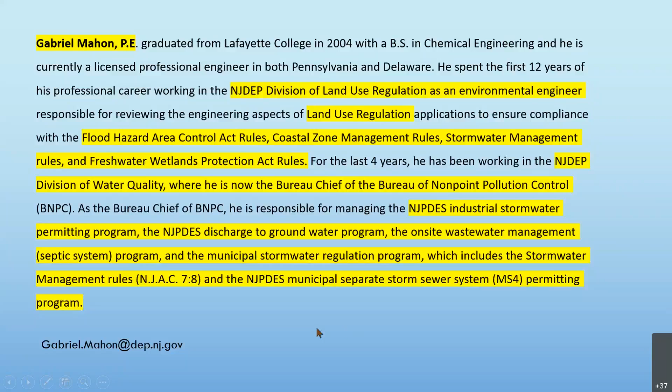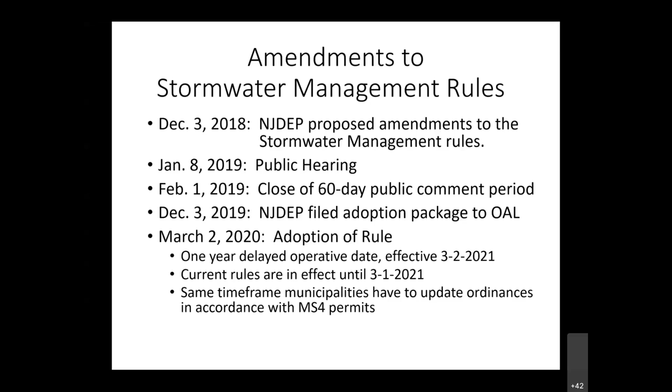At the same time, part of the implementation of the overall rules is that a municipality has to have a stormwater control ordinance. So when we amend the rules, it doesn't automatically amend their ordinances - the municipalities have to actually go back and amend their own ordinances. Our MS4 permit already sets up a time frame for municipalities to do this under any circumstance, even if we just noticed your ordinance isn't good and you need to fix it - they have a year to fix it after we notify them. That year was already set forth, and we wanted to line up when we're going to start reviewing it at the state level versus when it's going to happen at the municipal level. Of course, we can't guarantee the municipality will adopt their ordinance exactly on March 2nd of 2021, but having that 1-year delayed operative date will at least minimize the amount of applications reviewed at significantly different standards at the different levels if you need both permits.

Next thing I want to cover is what projects have to comply. I think you're probably all familiar with the term major development. What we're looking at here on the screen is the amended definition of major development under these rules. There's not sweeping changes to the definition, but there are some important things we were doing through frequently asked questions and some changes as a result of these amendments that we incorporated into the definition.

First I want to cover the intro statement. Now it says that it means an individual development as well as multiple developments that individually or collectively result in the following. In my opinion, that's mainly clarification of our own practices in the past, although it was never very clear before. The rule did say that you needed to count the ultimate disturbance and ultimate impervious surface on a site, but it wasn't clear exactly what that meant. Our frequently asked questions did try to clarify it and make sure that you couldn't break projects up into smaller projects to avoid regulation that way. So we're just trying to clarify it here to make it very clear that whether it's one development or multiple developments, if it totals up to one of these, it's major development.

The other main thing we've done is add timeframes to a lot of the various items here. The first one is the disturbance of 1 or more acres of land, which is unchanged, but we've tied it to February 2nd, 2004. When you're thinking about ultimate disturbance, that question came up many times: are we counting disturbances from 1990, or something from 1945? No, we're only counting things post-2004. That basically ties back to when the rules in their current form were adopted, which was February 2nd, 2004.

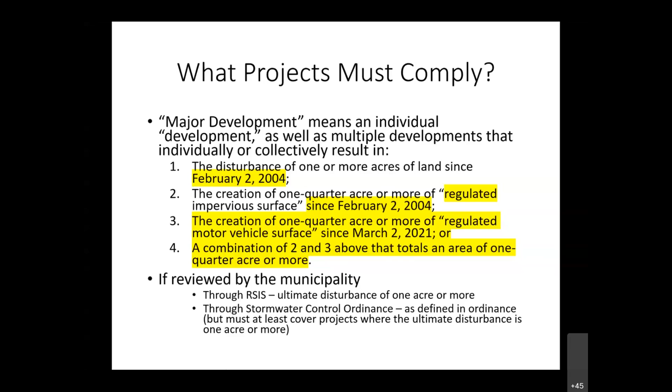Okay, next thing I want to cover is the layout of the rules and how we changed it. I'm only really going to talk about subchapter 5, our design and performance standards. That's really the meat of what someone's generally looking at in our rules. And this is what the existing subchapter 5 looks like.

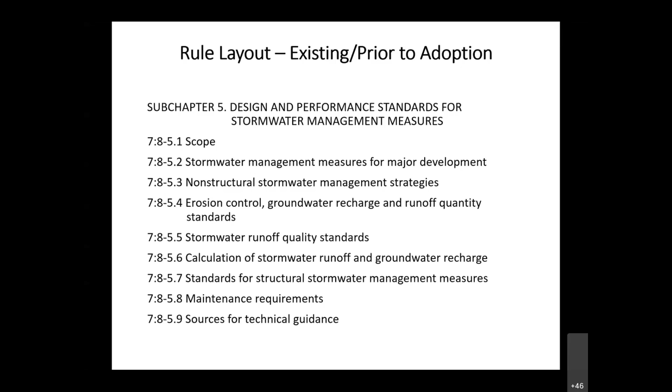We've got the scope, we've got the stormwater management measures for major development, which is a bunch of generic items that really apply to all major developments. Then we've got non-structural strategies. 5.4 is erosion control, groundwater recharge, and runoff quantity all together in the same section. 5.5 is quality. 5.6 is how you do your calculations. 5.7 is the standards for structural measures. 5.8 is maintenance, and 5.9 is sources for technical guidance.

And these are the edits that we're making. First of all, one of the major changes we're making to the rules in general is replacing the non-structural strategies with the requirement to use green infrastructure. Now, the non-structural stormwater management strategies aren't being completely deleted from the rules. They're being moved from subchapter 5, the items you'd review directly against a development project, into the municipal planning requirements, where it's more considered in the municipal plan as they put things together.

Because a lot of the non-structural strategies are about preserving areas, not so much items for actually managing stormwater, but they fit well into a municipal planning effort where they could decide, well, we don't want development in this section, we want to encourage it over here, so we're going to preserve some of this area over here. That's where a lot of the non-structural strategies, maybe not all of them, but a lot of them belong. And that's where we moved them.

The other thing we've done is we've taken a look at 5.2 and 5.7, which both were really generic items that applied to all major developments. We decided there was no real reason to keep 5.7, structural stormwater management measures, distinctly separate from 5.2, so we combined them together. 5.2 is now significantly longer because of that, but it really is just all generic items that apply to everything. 5.7 had things like what's the spacing on your trash rack, what's the minimum orifice size for a basin. No real reason it needed its own section in the rules.

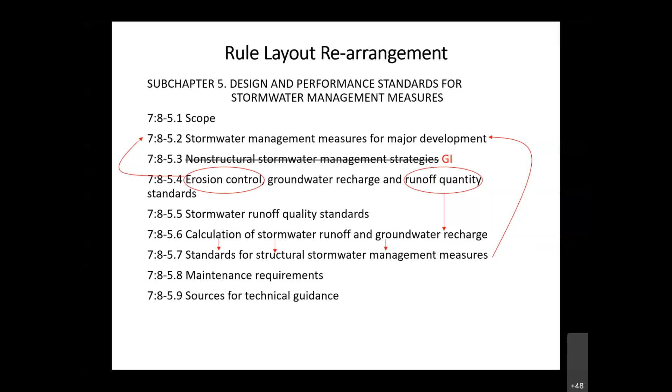And so this is what the layout turns into. We have the scope, and we have the much expanded stormwater management measures for major development. We have green infrastructure, groundwater recharge, stormwater runoff quality, stormwater runoff quantity. You've got your calculations, your maintenance, and your sources for technical guidance.

So what I think this has done is simplified the rule structure, and it's made the most important points of the rule structure, 5.3, 5.4, 5.5, 5.6, each given their own section, which I hope makes it more clear to everyone. I think clarity leads to better designs and better applications overall, so I think it should be helpful in that regard.

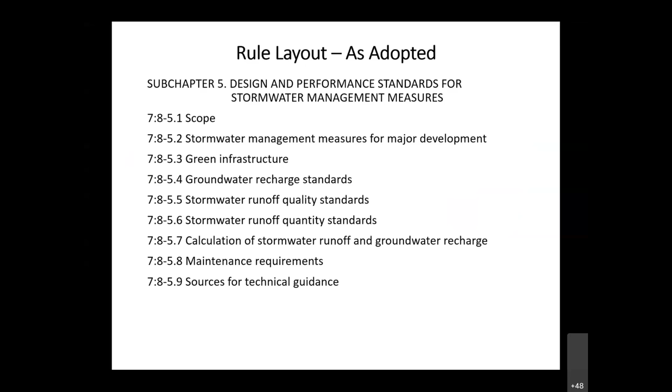A question I've often gotten, and now when I give this presentation I try to answer it up front, is why doesn't this say anything about evapotranspiration? You're right, it doesn't. But there's really one reason for that, and that is that in the design of a stormwater management basin, we don't really take evapotranspiration into account. When you're designing something for the 100-year storm, the amount of evapotranspiration you get in the maybe 72 hours at most that water is in a stormwater management basin is really largely irrelevant to the sizing of the basin. So it's not something we account for in the calculations.

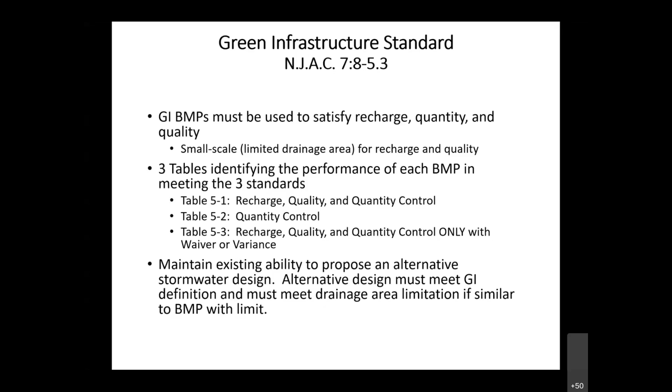So it's much simpler to choose a BMP we've already designed and approved, because then the designer doesn't have to answer any of those questions. But that option exists. I'm going to go through the tables now.

So this is Table 5.1. These are BMPs that you can use for recharge, quality, and quantity. These are the small scale green infrastructure BMPs. You've got cisterns, dry wells, grass swales, green roofs, and MTDs.

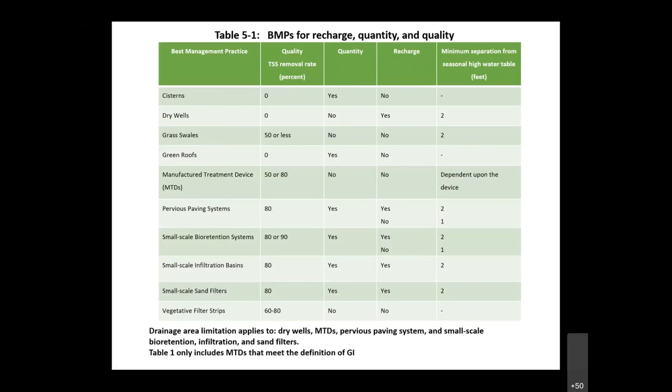Now, that might seem surprising a bit, but there are several MTDs that we've now certified as green infrastructure. If you want to look at the list, you can go on our website at njstormwater.org, and go to the BMP or the MTD page there. We've now broken the table out into two separate tables, one that shows which are green infrastructure and one that shows which are not.

Basically, the BMPs we've approved so far that are green infrastructure are pretty much all some form of a small scale bioretention system that comes like in a concrete vault. We are starting to see some innovation here, which is good to see, and something we hoped we would see when we made these changes. People are now looking at trying to do some MTDs that can provide some sort of infiltration, getting a little more creative. There's a constructed wetland type MTD that someone is just coming through with. It hasn't made it to my desk yet, but it's with NJCAT at this point, who verifies the functionality before we do the certification of them.

So there are going to be some more creative MTDs coming down the lines, and some of them may be green infrastructure. Also, we've got pervious paving systems, bioretention systems, infiltration basins, and sand filters, all of which need to be small scale. Remember, these are the small scale BMPs, so they have to be small scale, and then vegetative filter strips.

Now, I mentioned previously that the way we're getting small scale is by using a drainage area limitation. And a drainage area limitation does apply to dry wells, to MTDs, to pervious paving systems, and to small scale bioretention, infiltration, and sand filters. It's not the same for every one of them.

Dry wells have a 1 acre drainage area limit to remain small scale. MTDs, as well as small scale bioretention, infiltration, and sand filters, all have a 2.5 acre drainage area limit. And then pervious paving systems has a different type of drainage area limit. It's a 3-to-1 ratio. So if you have 1,000 square feet of pervious paving, you can have 3,000 square feet of regular impervious paving drain onto that, and that meets the small scale, that meets the drainage area limit.

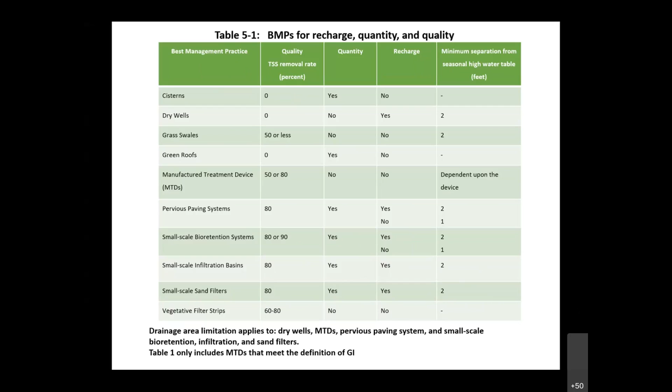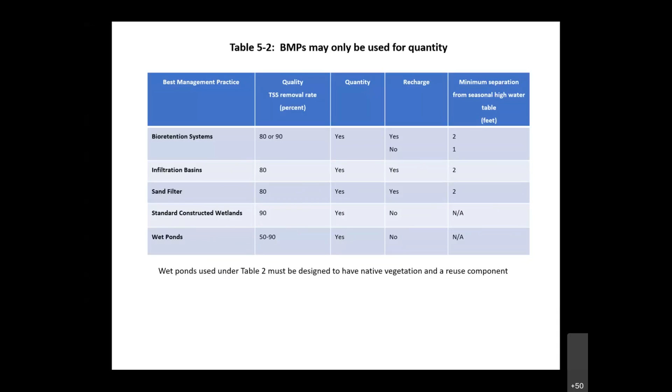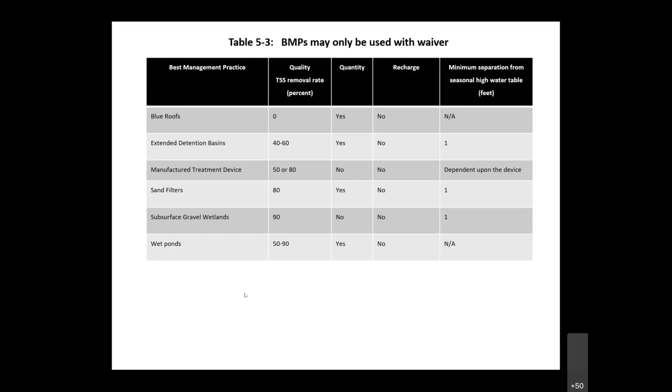Now, one other thing to think about with some of these is you could get creative. I've certainly seen some designs on the internet, not necessarily applications we reviewed, of combination green roofs and blue roofs and things like that. And you can probably get yourself qualified as green infrastructure if you do something like that that's creatively using these together, because it'll still have what's necessary to meet the definition of green infrastructure. So if you have a green roof and a blue roof, you've done the treatment with vegetation. So the fact that you're then retaining it also is not necessarily a problem. It's not going to preclude you from being green infrastructure. So you can combine them together and still use some of the aspects of these.

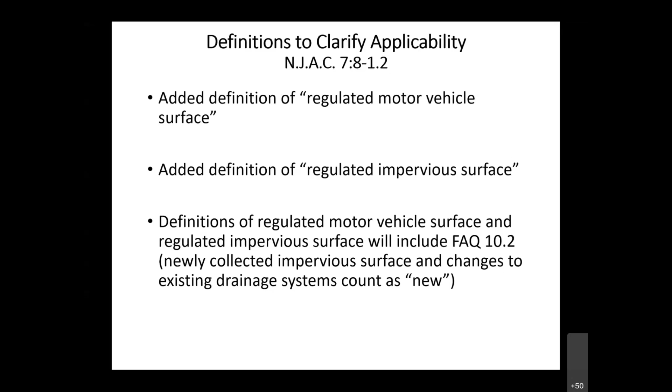Continuing the clarifications to applicability here, we've also made it clear that quantity, quality, and groundwater recharge have to be met in each drainage area on site unless they converge before leaving the property. This was very clear in our previous rules for the water quality standard, but for some reason it was not incorporated into the water quantity or groundwater recharge standards. Drainage areas aren't necessarily the same as your recharge areas. We thought about coming up with a separate term for that, but it seemed to make things far more complicated than needed, so we stuck with drainage area. Particularly from a quantity perspective, the fact that this wasn't previously incorporated, I don't understand why, because it allowed you to do your quantity control on one side of the site and not the other, potentially adversely impacting the property owner on the other side and still meet the rules.

Of course, in practice, we would never let someone do that. We would tell them they couldn't, but now we've actually modified the rules to make it very clear that you can't do that. Another thing we've done is move the requirement to do a groundwater mounding analysis from the groundwater recharge standard into section 5.2, the standard for stormwater management measures, so it applies to everything. It's not just if you're doing groundwater recharge that you need to do a mounding analysis, it's anytime you're doing infiltration.

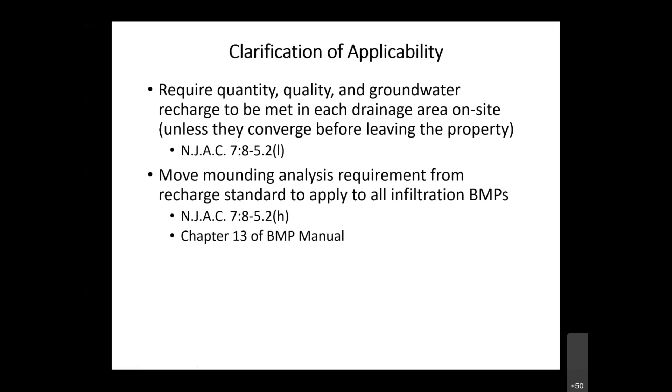Another thing we've done is a deed notice for green infrastructure. Under the non-structural stormwater management strategies currently in place, there was a requirement that if you're preserving something, you need a deed restriction, a conservation restriction for it. That makes a lot of sense—if you're preserving a forest as your non-structural strategy, you can't just cut it down after getting approval, so you'd have to deed restrict it.

We thought about doing the same thing for green infrastructure, but decided that was too onerous. We're looking at trying to require people to do multiple green infrastructure BMPs throughout a site, so having a deed restriction or conservation restriction on each and every one just wouldn't work out well. Anytime someone wanted to modify or move one, say they have pervious paving in their driveway or rain gardens along the house, and they want to put in an addition or move their driveway, they would need to come to the department, to the commissioner, to get their conservation restriction lifted. That really isn't the intent of what we want to do.

So we've decided to just do a deed notice, and this deed notice will require that they incorporate the description of the BMP and its locational information, in state plane coordinates, on their deed. This will be in addition to the requirement already in our rules that they have the maintenance plan attached to the deed. So now on any property where there's one of these green infrastructure BMPs, they'll have a description, locational information, and the maintenance plan—everything they need to know to manage that BMP going forward.

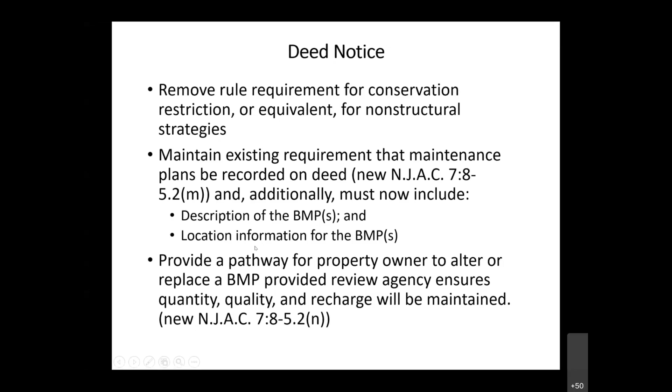There are also a few changes we incorporated related to combined sewer overflow. As you're probably aware, we've got 21 municipalities in New Jersey with combined sewer systems. A combined sewer system carries both stormwater and sanitary wastewater in the same line, which is no problem when it's not raining, but whenever it rains, those systems overflow because there's not enough capacity to bring all that water to the treatment plant.

So as we're requiring municipalities to figure out ways to eliminate their combined sewer systems through our other rules, through our NJPDES rules, we're doing some of this to help give them every tool in the toolbox they possibly can to make that happen. One of the things we're doing is clarifying that water quality treatment is required for discharges in combined sewer systems.

There is an exemption in the current rules, still retained in the amended rules, from the water quality standard for projects where you have an NJPDES permit with a numeric TSS effluent limitation. And that makes a lot of sense, right? If you already have an NJPDES permit for, say, your wastewater treatment plant, and you put your stormwater into the plant's process, well, you don't need to do your 80% TSS removal under the stormwater management rules because you're going through the treatment plant's process, and it's going to remove more than 80% to begin with already. An NJPDES permit with a numeric TSS effluent limitation is going to come with a requirement that you sample your stormwater before you discharge, so we're going to have proof that you actually met the water quality standards that way. So that exemption makes a lot of sense.

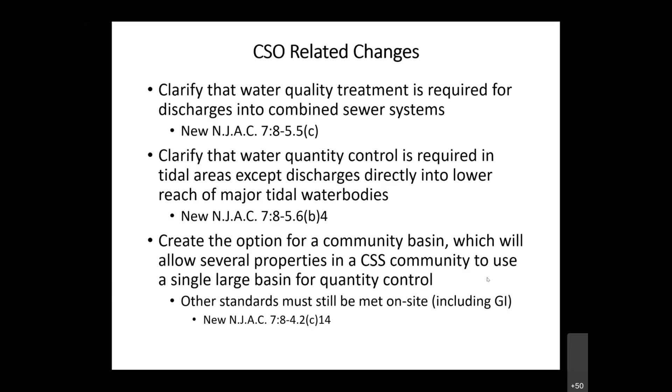At the same time, they would still have to do quality and recharge on their site, so it's not like they're getting out of incorporating green infrastructure on the property, it's just for quantity. Again, I don't know if anyone will ever use that, to be honest. Just an idea we came up with, because we wanted to give our combined sewer communities every tool they could come up with. So this is just something we threw out there.

Okay, last thing I want to go over is the variance. This is the existing variance standard at 7:8-4.6. This allows a municipality to grant a variance for stormwater management if they have a mitigation plan as part of their municipal stormwater management plan. That mitigation plan has to identify what measures are necessary to offset the deficit created by granting the variance, and ensure that mitigation happens in the same drainage area for the same design performance standards.

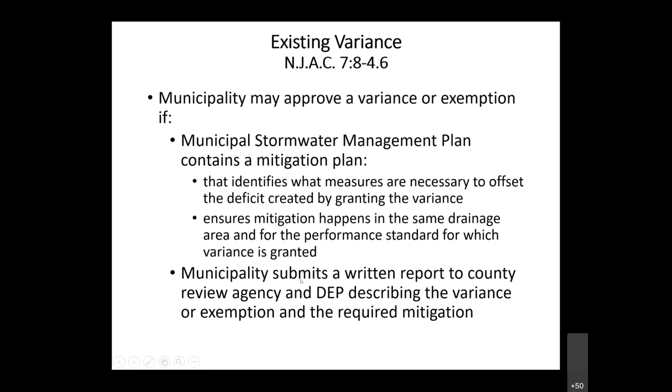A municipality has to submit a written report to the county and to the DEP describing it, but that's it. There's really no clarity on exactly how you do this. So we've added a lot more clarity and a couple of restrictions.

On the previous slide, there was no restriction on when they granted a variance. It didn't say the designer or developer has to even prove they couldn't do it on site, it just said if the municipality grants it. Now this makes clear they have to do it on site unless it's technically impractical for engineering, environmental, or safety reasons. Even then, they still need to meet it on site to the maximum extent they can, and the mitigation off-site covers just what could not be met on site.

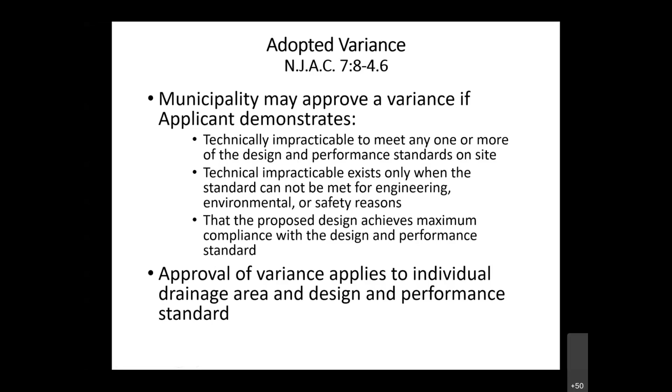It's also made clear that the approval of a variance applies only to the individual drainage area and design and performance standards. So if you say you can't meet quality for some reason and the municipality agrees, that doesn't mean you also don't do quantity on site. That just means you do your quality off-site as mitigation.

We've also added clarity on when and how you construct a mitigation project. One question we've gotten is whether the mitigation project has to be within the actual mitigation plan. We've made clear that no, the project doesn't have to be spelled out in the mitigation plan, but the mitigation plan has to be used to evaluate the project. So it could be spelled out in the plan, or the developer could propose it, and the mitigation plan just gives the municipality the tools to evaluate whether that's appropriate.

We're also now requiring that it be approved no later than preliminary or final site plan approval of the major development. That makes sense, you can't just defer your mitigation into the future. It also has to be located in the same HUC 14. Previously it just said drainage area, which was pretty unclear, since we're all in the drainage area of the ocean. So this clarifies that it has to be in the same HUC 14.

It also has to be constructed prior to or concurrent with the major development, not just approved. If you think about it, if you're saying you need to do this on site to avoid an adverse impact, and you're doing it off site because you can't do it on site, you need to construct the off-site stuff first. Otherwise your on-site project could potentially have adverse impacts on surrounding properties.

It has to comply with green infrastructure standards. The applicant or party responsible for maintenance of the major development has to be responsible for the mitigation project too, so you can't set up a third party LLC to do the mitigation for you. It has to be the same entity. So if it's a residential development, you could have a homeowners association, and yes, that association could also be responsible for the mitigation project, but you can't create some other third party to be responsible for that.

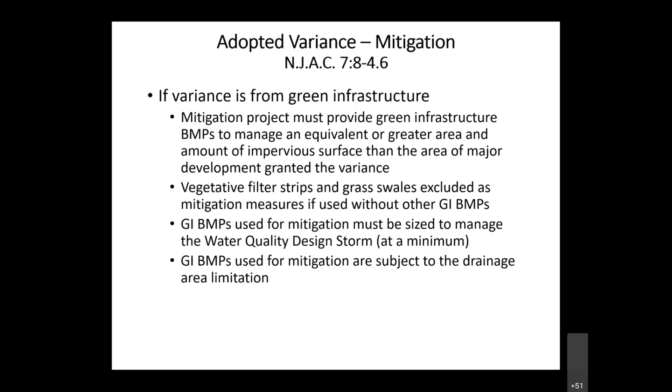One important thing to note on Chapter 5 is that it will allow infiltration in your quantity control routings in green infrastructure BMPs. Also, Chapter 12, while we haven't made a ton of changes to soil testing requirements, incorporates some new concepts and requirements if you're doing small-scale distributed green infrastructure systems. If you're putting small-scale green infrastructure all over a site, having two soil profile pits in each one, especially when they're only 1,000 square feet, is excessive when one pit might excavate the entire BMP area anyway. So we have less onerous requirements for those distributed systems.

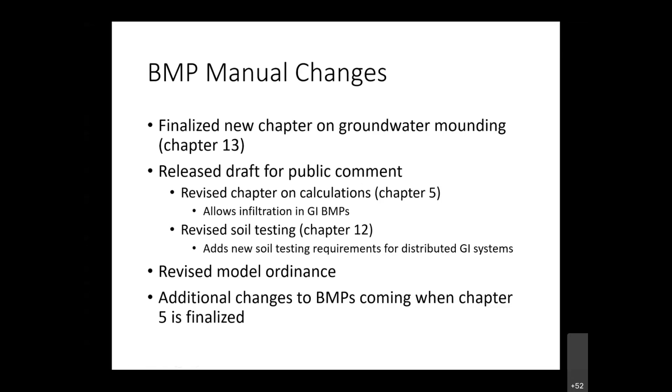We also adopted a revised model ordinance that municipalities can use instead of creating their own. Be aware additional changes will come when we finally adopt Chapter 5, because some of the calculation concepts in there will need to carry over into other chapters. Now, I do have some examples I can go over if there's still time.

These are questions I often get about how the new standards, particularly regulated impervious surface and regulated motor vehicle surface, apply to roadway projects. Let's say you're reconstructing an existing roadway and nothing else—it's over an acre, but you're not adding any new impervious surface, curbing, or collection system. That's technically a major development because it's over an acre of disturbance.

But because you're not changing anything, you won't have to do anything for quantity control, since one way of meeting quantity is to not change the hydrograph, and this wouldn't change it. You won't trigger water quality since you're not creating new impervious or motor vehicle surface. And for recharge, it won't affect the amount of recharge happening on site, so you don't have to do anything there either. So while that could be a major development, you don't really have to do anything.

It's when you start adding other things into the project that you have to address stormwater management more thoroughly. So let's say you're adding a curb and a drainage system—I briefly touched on this. It depends on the exact scenario, but if there was existing water quality treatment happening, which occurs in many cases, adding a curb and collection system where there wasn't one before is going to trigger the water quality standard at that point.

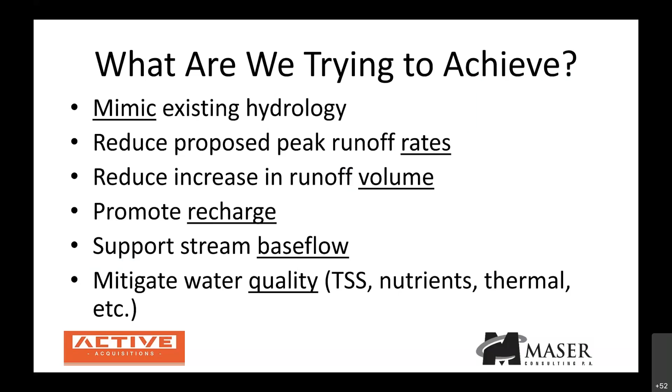And that helps make the rules much more obvious. If you kind of have this in the back of your head that we're looking to mimic hydrology, reduce runoff rates, reduce volume, promote recharge, promote base flow, mitigate water quality. If you kind of keep that in your head, then everything kind of makes common sense.

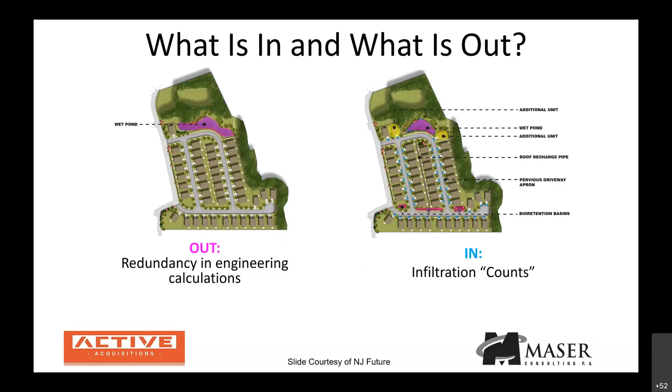We're addressing the stormwater throughout the site as opposed to the end of the pipe. By doing that, there's actually the potential to get more development yield. If you compare the two, you'll see in the yellow there's 2 additional units shown, which was important to the regulated community because that was a way to help offset the costs of constructing all this green infrastructure throughout the development. So it's really a win-win. Developers are getting a better development, and at the same time, we're achieving a far superior result in terms of stormwater management. That's basically this bottom thing here, just saying that benefit.

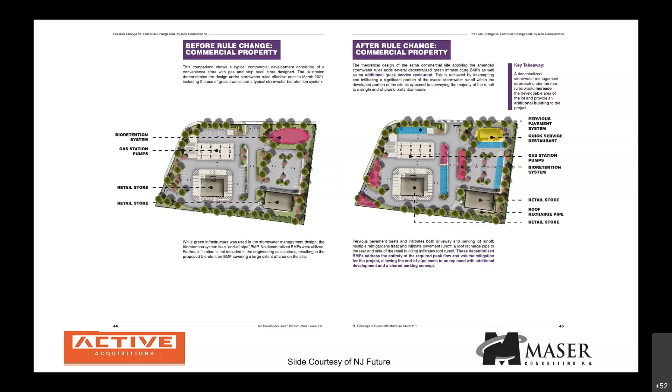So this is just kind of blowing up on it. You can see the bioretention system in the top right. This slider is actually live in the manual on the internet, so that's a cool way to go back and forth. But here you'll see we've added the porous pavement, we've added the bioretention.

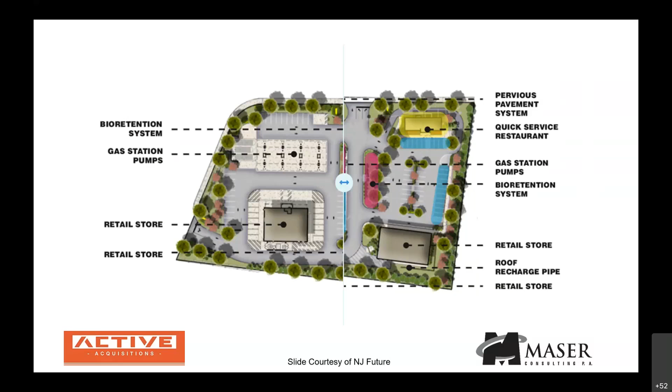It's important to remember too that green infrastructure is not just doing basic suspended solids removal. It's also capable of doing thermal buffering so we don't get overly heated water coming off these hot surfaces directly into streams. It's also very effective at nutrient loading, whether phosphorus or nitrogen. So there are many other benefits, even though they're not formally regulated with a numeric standard, green infrastructure is still achieving that. It's gone way beyond the old-fashioned detention basin with the 3-inch orifice just trying to get suspended solid reduction.

And again, you can see the whole site with some additional bioretention. So stormwater management will count now fully, and probably the biggest thing is the infiltration. It allows infiltration at the design rate, which is basically with a factor of safety of 2.

You do have to, and this is very important, and I'll talk about this more later, check the groundwater mounding. So it's not just whether the soils can handle it, but whether based on the drainage area, the shape of the BMP, the groundwater mound is going to retard, from a routing standpoint, the flow of water into the ground. So there is a little bit more complexity from a design and calculation standpoint, but it's certainly well worth doing. You're going to get a better design overall by looking at this fully from a realistic aspect.

But it's not just infiltration. For non-infiltration, there are ways to count that too. So you should always be counting your GI, and that's something I really preach to design engineers, to make sure they're taking full credit, because we want this to be well received by the regulated community. The key part is that they're not just experiencing extra costs of green infrastructure, but receiving benefit on the back end, as I showed in some of those side-by-side examples. So this is a way in a non-infiltration BMP - the reduced curve number method is a great example of how that can be done, which I have some additional slides on.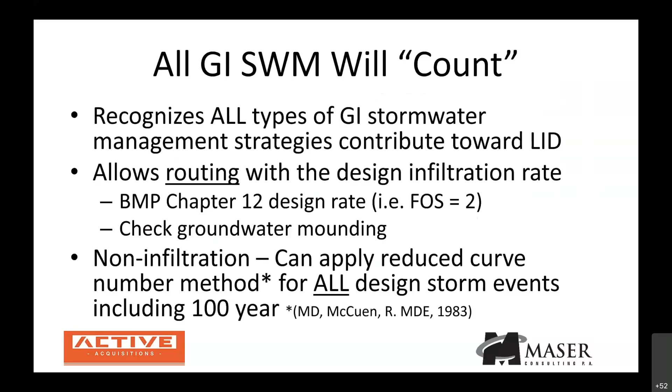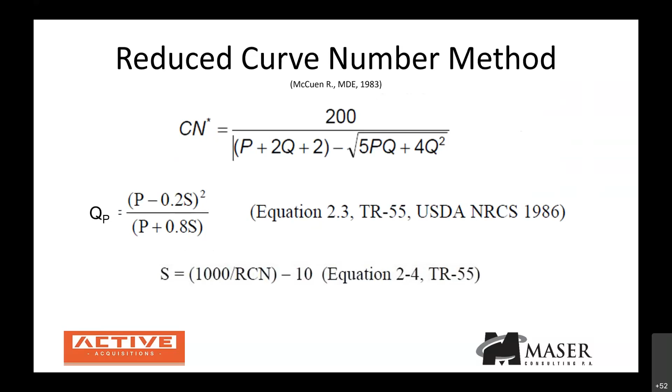Reduced curve number method is essentially transforming the curve number based on the volume of the BMP. Traditional curve number for impervious surface, for instance, would be 98. But if you've got some small scale BMPs servicing that impervious surface, maybe that goes down to 88 or so, depending on the exact volume. So it's a way to transform that curve number for that particular drainage area. Then when you route your end of pipe system, you're using that area with the small scale BMP as a CN of 88, which inherently reduces the size required for that end of pipe system.

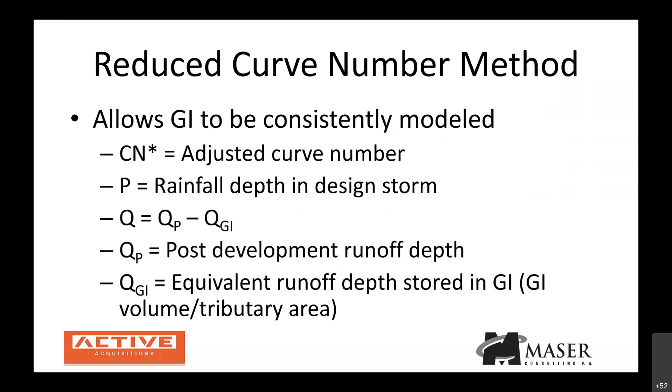This will be in the recording, so you'll be able to go back and look at this later, but this just kind of defines what all those different variables were in the equation.

So Gabe touched on this already. There's this new chapter on groundwater mounding. It relies on the Hantush method. It's fairly straightforward, so those of you that are engineers will be somewhat familiar with it. There's a lot of good examples and clarity in the BMP manual, so it's definitely a chapter worth reading cover to cover. You heard from Gabe that these new chapters are about to come out, Chapter 5 and Chapter 12.

The Chapter 5 revision is actually the one that's going to allow infiltration. There'll be additional changes to Chapter 9, which covers the individual BMPs, that will mirror that, basically allowing the infiltration. We'll talk about some of the details.

Very important is the revised soil testing. This is really a step up from the former Appendix E. The methods and procedures are laid out much better, in a lot more detail, to help deal with the typical mistakes that are made.

One key thing in soil testing is, in order to do the groundwater mounding, in addition to the soil characteristics, you have to know the depth or thickness of the saturated zone. So a continuous boring is necessary to do that. Otherwise, you can assume a 10-foot thickness, which might be fine on a typical convenience store site, something relatively small, probably not worth going beyond that. But for a site that's anything bigger, it's going to be worthwhile to get that. So that's something you should be seeing in submissions, with the geotech reports, is some additional data with regard to the groundwater mounding.

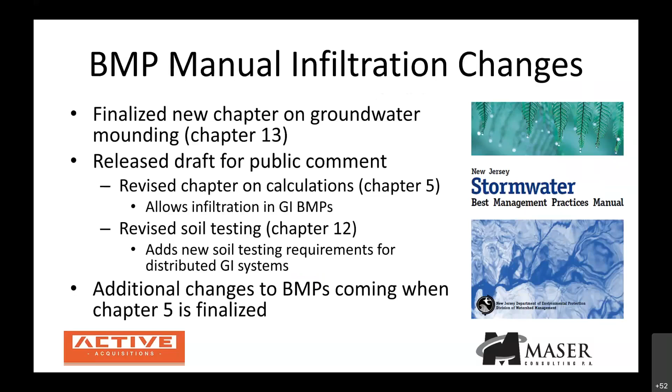So in terms of the approach, I'm always trying to lay out for design engineers kind of what are you going to do different now? And then for you folks, primarily as regulators, what are you going to see different?

What you should see in terms of submissions is a lot of small scale green infrastructure. There's a regulatory reason for that, but also the smaller and more distributed the green infrastructure is, the more credit you can get for it. Because groundwater mounding becomes much less of a factor when you have small scale green infrastructure distributed all over the site. The more concentrated they are, the more of an issue groundwater mounding is. So if you want to fully capture this benefit from counting infiltration, you really want that distributed. There's some other inherent benefits to that as well.

The more distributed they are, the less likely there is to be a wholesale failure, because if any one BMP were to fail for whatever reason, it's only one of many, as opposed to having one end of pipe infiltration basin. If that fails, well, now the whole site doesn't operate. So there's definitely a lot more security because now it would require multiple failures in order for a site to holistically fail.

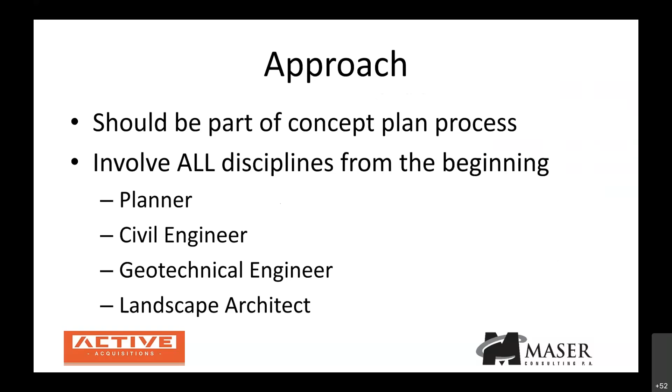We always kind of map soils as part of concept planning, but now we want to go beyond that and really use every leftover area. So you really need to have a full understanding of what the soils look like site-wide.

Gabe had mentioned in his presentation that there's some ability to reduce soils testing when you have consistent conditions. But if you have a variable site, it pays to do that work up front to understand what you're dealing with, so you can customize BMPs in each part of the site for maximum effectiveness. That helps you be most effective from a stormwater management standpoint, but also get the most bang for the buck in creating these BMPs.

Another thing to consider is whether you can get multiple functions out of the BMPs beyond just stormwater management. For instance, one thing we've successfully done is create BMPs that are around or in the view shed of an outdoor seating area from a restaurant, or intertwined into a public area, maybe a playground, where now it's not just functioning as stormwater management, but creating a view shed or park-like setting to use as well.

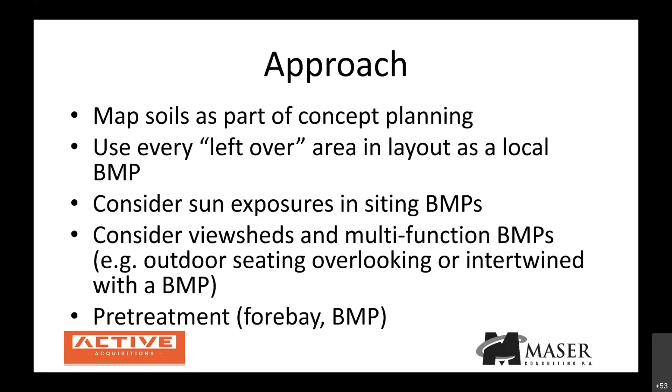Pre-treatment is also very important. A forebay or another small-scale BMP in front of the table 5.2 large-scale BMPs is going to be very important from an infiltration perspective. So if you're having those pre-application meetings, remind folks that that's a key element.

This maybe isn't as applicable to the districts, but it's something I like to point out. Bioretention is definitely going to be one of the most popular choices when implementing GI for a number of reasons. One, they look great. Two, it's very effective from basically every regulated aspect. But it certainly goes beyond that.

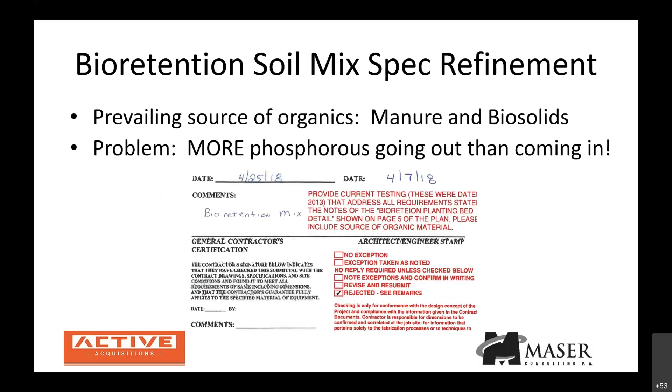Bioretention is very effective at nutrient removal. I have found, though, in doing some DEP grant work, that depending on the mix, it can actually increase the problem - you could actually have more phosphorus going out than coming in. That all has to do with manure and biosolids, so keeping that out of the bioretention is key. You want it based on organic matter, plant-based materials, no manure or biosolids.

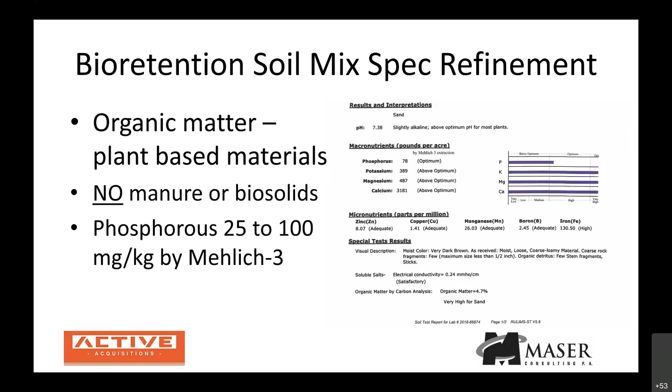You want the phosphorus down to 25 to 100 milligrams per kilogram by the Mehlich 3 method. These are relatively easy to achieve in commercial production.

The other important part is the aggregate - not just the organics, but the actual sands and so forth. We have found that keeping the fine and very fine sand to a maximum of 25% is very important. We're still working out what a minimum coarse percentage might be, but the more uniformly graded the aggregate is, the more successful it is, because it just can't bind up.

We found they take a lot more abuse. That's true in straight infiltration too, even when it's not bioretention, where you just have an engineered sand layer. A uniform coarse sand as the top 6-inch layer is really a lot more resilient than your typical K5 sand, because K5 can actually qualify as quite a few different mixes, and not all of them are as resilient as a uniformly graded coarse sand in terms of maintenance.

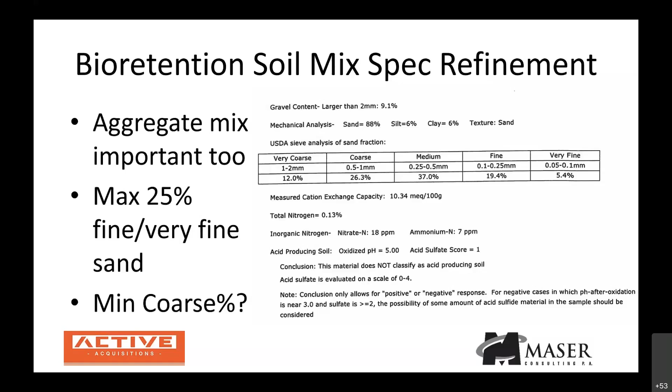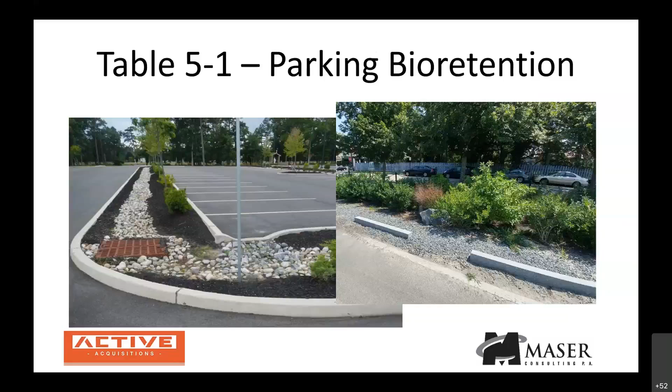The one on the right was actually in Newport - this is a commercial shopping center. I like the way they did it here. They had a flush curb that kept the asphalt pavement nice and neat and straight, and then they had these relatively attractive wheel stops just to keep somebody from running right through it. But because it's open like that, with this gravel edge, it keeps the stability and slows that water down as it's coming off of this asphalt. And then it goes into that landscaped area where you're getting the recharge and water quality.

Sand filters - we don't use them that often, but there are times in redevelopment projects and whatnot that these can make sense depending on what you've got going on.

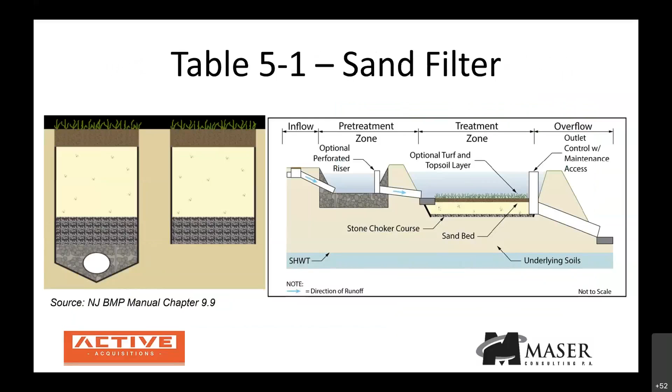In a really large event, there's an overflow inside the box. So if you were in a major storm, whatever can't go through the water quality system would bypass and go out. So you're still getting flood protection, but for the vast majority of storms, you're going to be going through this bioretention system.

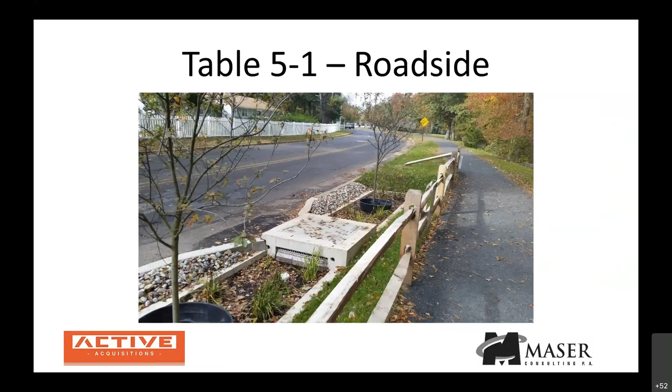And you can see here, it's very narrow, very small profile, so it's not changing your geometry. These are actually retrofits done under a DEP grant that didn't require disturbing this existing multi-use path or the roadway in any significant way.

Porous pavement is one of my favorites. You get really all four types of stormwater treatment, because you're getting attenuation, you're getting water quality, you're getting low impact development because you're disconnecting impervious surface, and you're getting groundwater recharge.

One thing I'll note too is some of you that have been doing this a while may have some bad impressions of porous pavement - you may have seen aggregate that's getting displaced by vehicle tires and all. One of the breakthroughs is the DOT spec has a polymer modified binder, and that has made a world of difference now in aggregate stability. So definitely you want to make sure we're specifying the DOT spec or something similar to that.

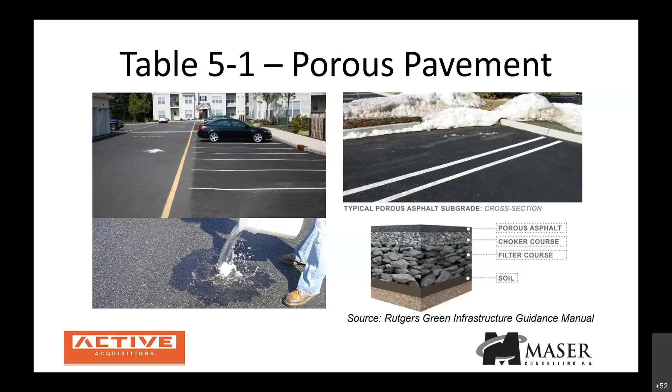Grass pavers only make sense in certain locations, but this particular project is out in Tinton Falls. It's overflow parking for a major sports complex, but it's a real nice alternative that's very stable, and at the same time you're getting great water quality. Especially for all those times when it's not in use, it's actually a stormwater management facility.

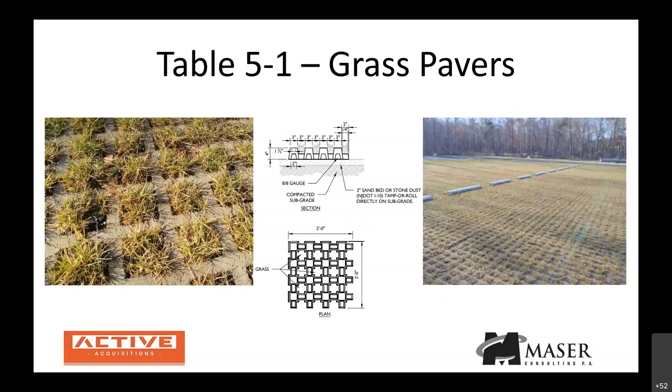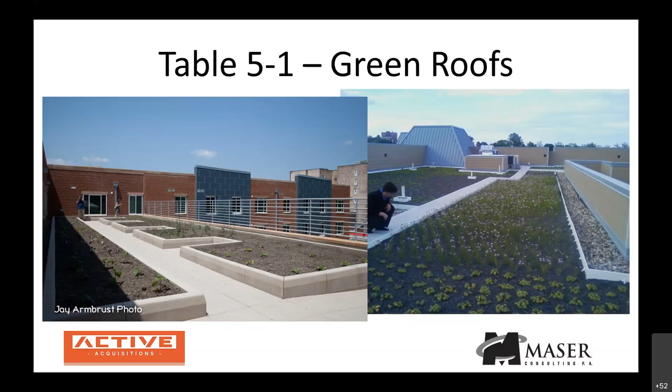Vegetative filter strips are particularly good at poor soil areas where you don't have good recharge soils - it could be clays or other restrictive soils, maybe shallow groundwater. These can be a great approach to provide some water quality and break up the connectivity of impervious surfaces.

In terms of table 5.2, you've got your infiltration basins, and I'll say again how important that uniformly graded coarse sand is on top. Even if the soils are good, even if they're K5, K4 sands in the existing condition, they're typically well graded - bank run sands are usually fairly well graded. So we've found it's worth spending the money on an engineered, uniformly graded sand on that top layer, which protects that existing subsoil and will take a lot more abuse and require a lot less maintenance. That's really a key point of making these basins work.

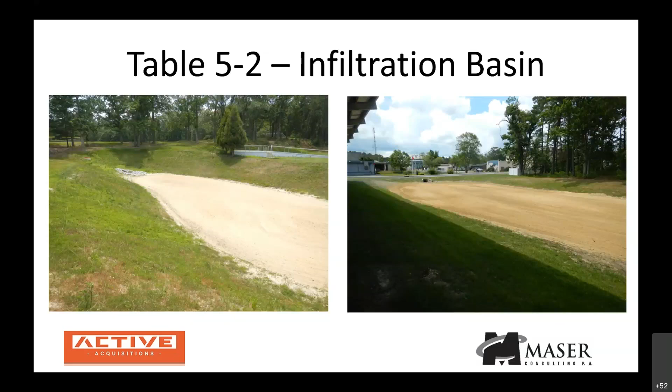Subsurface infiltration, still part of 5.2 - you see these a lot in commercial types of projects, such as the examples here. StormTrap systems can be good, again particularly in high value real estate where you need to get a lot of volume but it has to be underground - that's a great way to go. When the constraints aren't quite as bad, then perforated pipe, like you see on the right, is an excellent solution.

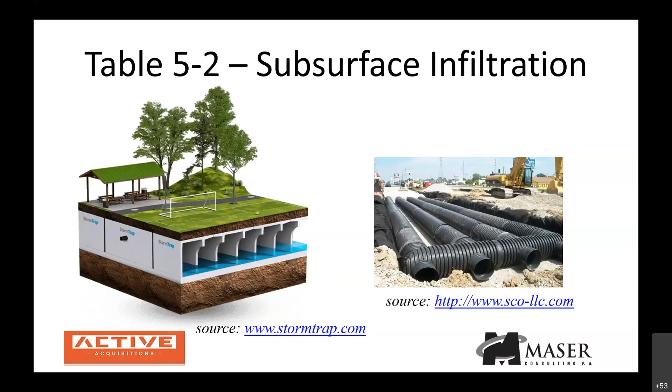Constructed wetlands, one of my favorites in really poor soils areas, when you've got shallow groundwater, clay soils, or restricted horizons. This is a unique application - what we did here is in the foreground of the picture, I should actually add another photo to this slide. There's a porous pavement parking lot just uphill of it, and even though the soils themselves don't recharge, the water comes down through the porous pavement stone and then leaches out into the shallow soils that feed the wetland. So instead of that pavement giving a slug of water during the rain event, it actually bleeds out over several days and really helped this wetland succeed by keeping a more uniform hydration. Great solution when you've got really poor soils or shallow groundwater.

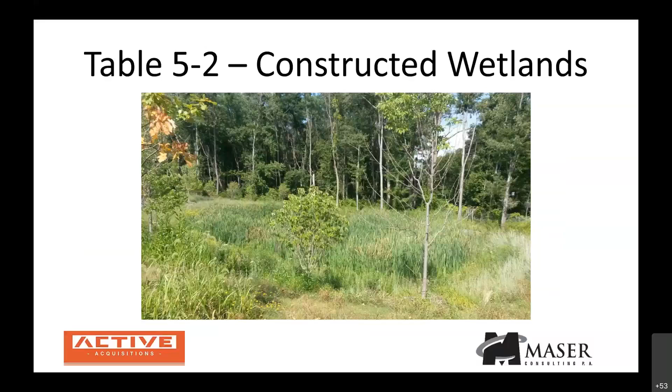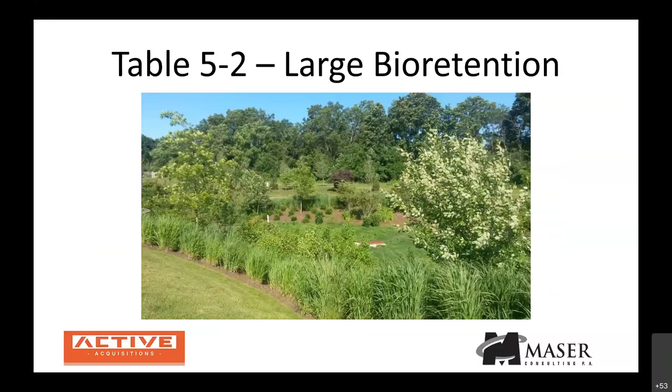Large bioretention - we use this approach quite a bit. This happened to be in a residential community, but it can work anywhere. Very attractive, works well in a commercial setting where you don't want an ugly basin up front or in public view - just really a great setting. It's easy to envision how you can incorporate walking trails, park benches, or an outdoor seating area overlooking this. A lot of ways you can take advantage of this in the layout.

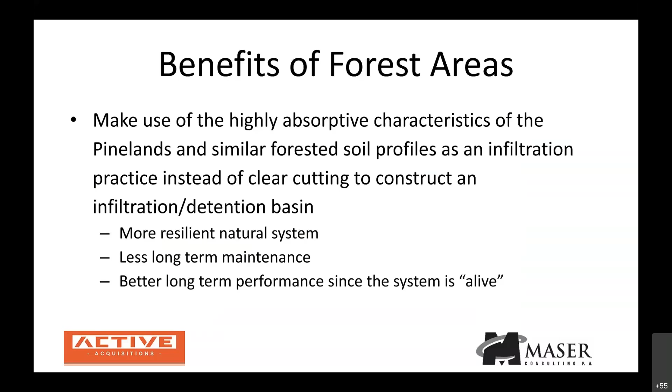Also, you're getting better performance from a water quality standpoint because you've got all these plants and animals that are uptaking or transforming nutrient loading.

We're looking at different ways, and I'll caveat that the DEP has not approved any of these yet. We have a private grant looking at some early approaches to how these might be sized, but nothing has been approved. This is a work in progress - I won't spend too much time on it, but that's some of what we're thinking on how you might size a forest system.

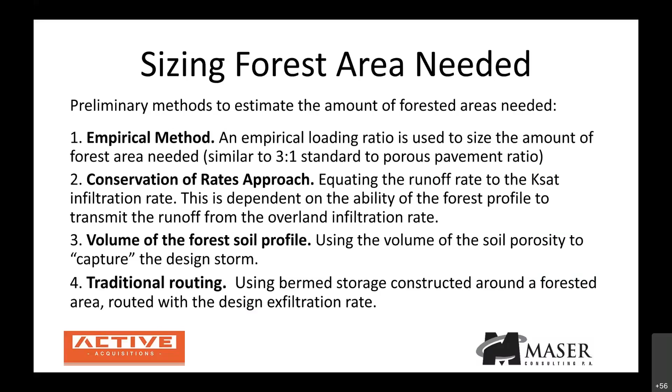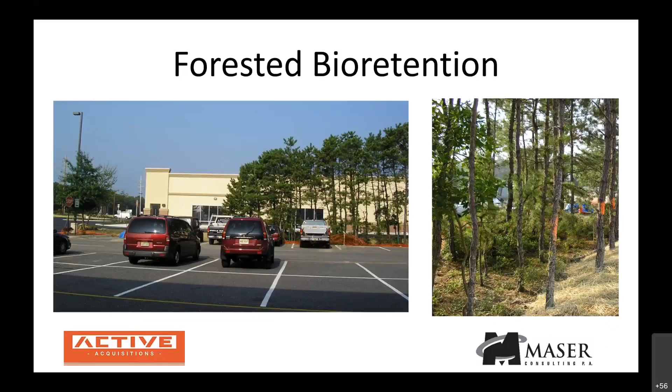It's been in place for quite a while and there's no wetland vegetation or any change occurring. Even if the ecosystem did adjust, I don't think that's a bad thing - I still think this is superior to a cleared infiltration basin. In this case, it's been so effective that the water's not staying in the soil profile long enough to change the vegetation; it's recharging relatively rapidly. Good example of what that might look like.

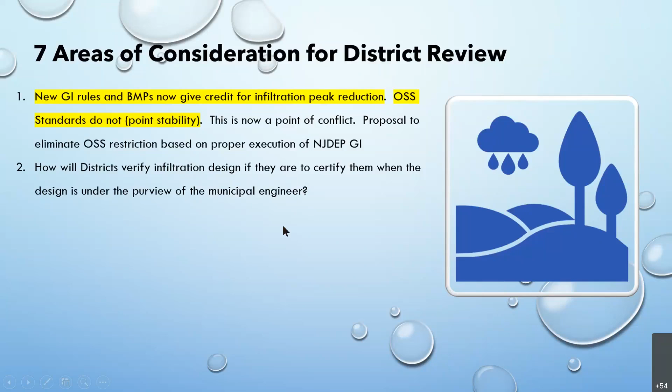One of the questions I had was if we are going to approve infiltration, normally we review things that we approve. I have a concern about doing duplicative reviews that should be done by municipal engineers. I don't think we need to do that, but we need to find a mechanism so that districts have assurance that when they say okay for offsite stability based on infiltration, we have some comfort level that the infiltration design has been properly executed in accordance with the DEP requirements. So that's a logic problem for us to figure out.

We are not familiar with the reduced curve number method. I mentioned this to Jeremy through an email a couple days ago. For those familiar with the old NRCS ponding factor, it has a somewhat similar intent: you're accounting for areas that take out runoff, they hold the runoff, and the overall effect is as if there's a smaller drainage area or smaller curve number. The ponding factor method is much grosser in how it treats things, and it's for much larger areas. We're talking about very small areas here, less than 2 acres, probably quite a bit less. How would you even consider a ponding factor on something that's a quarter or a third of an acre? We need to become familiar with the reduced curve number method, because we'll see that show up and then we'll start asking questions.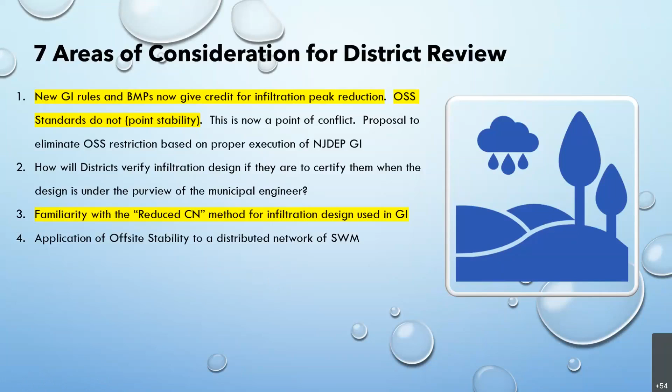This is more of an observation. Jeremy, I think it was you that mentioned offsite stability related to distributed networks of stormwater management systems, devices, structures. I think there's actually a positive advantage for our concerns about offsite stability - you grabbed the thunder there, buddy. When you put all your eggs in one basket and there's a failure, you've got 100% failure. You could have 2, 3, 4, 5 distributed infiltration GI type structures, and if 1 or 2 of them fail, you still have 70, 80% still working, and the likelihood is some are discharging in different directions. You're not having failure all in one place by one structure. You're distributing that failure around the site, and it's also a lot easier to maintain and fix.

I think this is more for us - we do this anyhow, but I think we're going to have to really work with the development community. If we're going to rely more on infiltration, especially for mitigating peak flows, that means during construction we really need good vigilance on the site to make sure those things don't get contaminated. They're going to be the lowest point on the site underground, and they're going to be the most vulnerable to the worst part of the erosion process - worse in terms of the fines that come off that aren't trapped or filtered by inlet protection and silt fence and all that stuff. They're going to go down into those infiltration structures. Those are the kinds of things we need to figure out how to properly take care of and protect.

Long-term maintenance, that's a consideration, but that's beyond the scope of our program. Once we hand the keys over at the end, the final report of compliance, our involvement from a regulatory perspective is complete. We do have an opportunity, all districts do, to offer us for doing inspections of structures through our H&H database - that's just a little shameless plug there. But long-term maintenance, from a municipal perspective, if we're going to put all this stuff underground and out of sight is out of mind, I'm concerned that in a couple of years people forget about it because they're not sitting there looking at it. We may end up with surprise peak flow growth - where is this coming from? Nobody knows. Well, it's coming from underground.

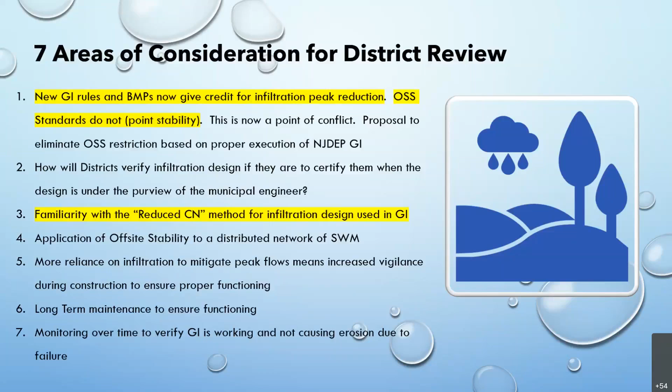GI and OSS conflicts. I mentioned this, I'm just going to zip through this. So it was based on a 70% failure rate.

Pinelands, I don't remember the exact date, but I think it was prior to DEP's uptick in their design requirements, but they had done a study in their own area, in their own backyard, and they found a similar rate of failure. But then we did our study, and I think it was 80 or 88% of the structures we examined were actually working when they were sited properly.

Now, we did actually visit some that were sited poorly. I remember one in Warren County, where they put a so-called infiltration structure, a surface basin, in an area where the soil was so full of clay and fines that you could scoop it out and take it to your local pottery shop to make a beautiful fired bowl. There was no way it was going to work.

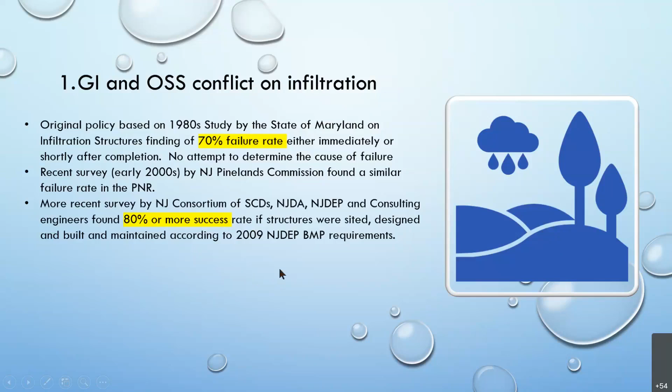So as I mentioned, it's not just a technical aspect; it's a policy or philosophical issue we need to tackle as well. Are we regulating things that we can't foresee, can't predict, and that exist long after our presence is no longer required on site?

So I don't see a whole lot of conflicts with what is being presented by DEP. In fact, just the opposite. I see a lot of reduced conflicts, a lot of logic, a lot of clarity, and a lot of reasonability that was not there in the past.

And I mentioned we'll be looking at this immediately. I asked Jeremy if he'd be interested in participating in a group discussion like that, and his hand shot up in the air before I could even get the last sentence out of my mouth. He was like, 'Oh, pick me.' So yeah, Jeremy, we'd like to invite you to be part of that.

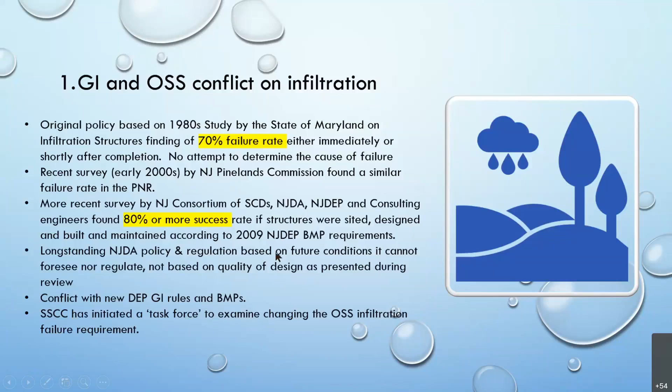So I mentioned about verifying proper design on the plan. We don't currently review for infiltration. We just look at, hey, if it fails, what's your peak flow rate, and are you going to cause an erosion problem? We don't want to duplicate the municipal review, and we need to come up with some system or mechanism, maybe a checklist of parameters. Jeremy had mentioned that.

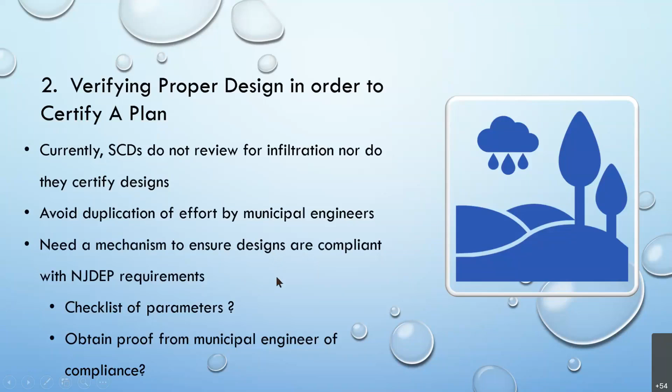I was thinking that since we're usually the last ones to get the plans, everybody else has already issued their permits, DEP, the municipality. With that assumption being potentially true and continuing to be true, it's possible we could get verification from the municipality that the infiltration designs have met the DEP requirements, and then we would accept that. That's just a thought, not policy on my part. Just looking for ways to make this streamlined and not duplicate things.

Jeremy mentioned the reduced curve number method. I don't have time to go into that, and I'm not that familiar with it myself. I'd have to study up on it as well. That's something we need to learn and become familiar with, because we'll see it show up in our plans. Basically, once you account for GI, you can back-calculate a curve number, and you end up with a lower curve number than you would without that GI there. Therefore, your remaining areas get some hydrological benefit from having these GI structures on site.

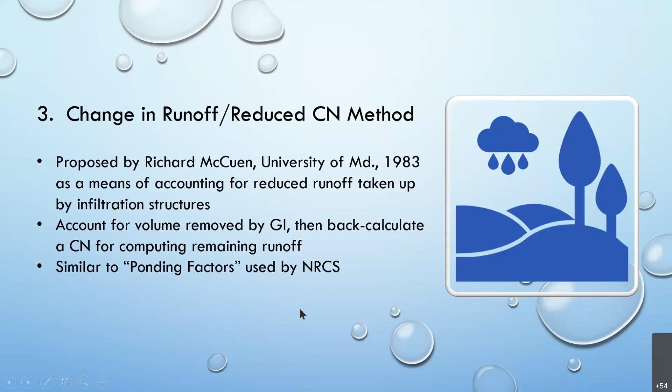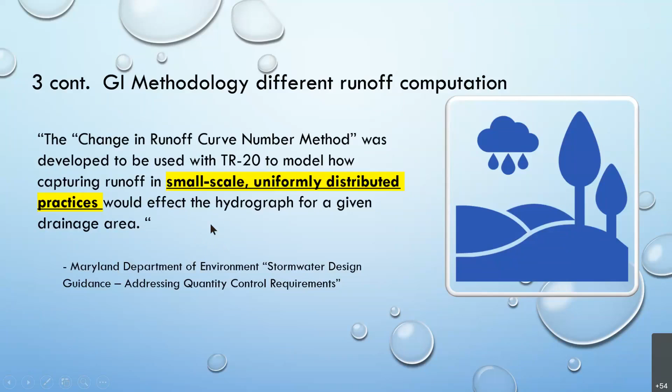And I mentioned ponding factors. This is more precise than the ponding factor, a lot more precise—well, as precise as this stuff can be anyhow. I was looking for references for the reduced curve number method, and found this from Maryland Department of Environment, where Rick McCuen, a professor of engineering at the University of Maryland, worked, so I'm not surprised to find this in Maryland's DEP. But note what they talk about is small-scale, uniformly distributed practices, and that's where the ponding factor approach differs, since ponding factors apply to many acres, very large scale, really agricultural watersheds. This is for a much more precise level of analysis.

And if it goes down, then we have erosion. And now what do you do? Especially if it's an underground infiltration structure, you get a lot of problems.

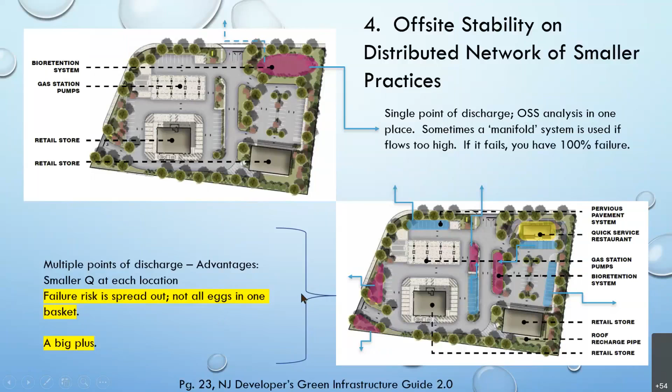With the new approach, I don't know that this is 100% true, because I haven't seen the designs yet. But using my imagination, a distributed network of infiltration and bioretention structures would have distributed points of discharge. As Jeremy mentioned, if one fails, it doesn't mean the others will fail too. So for stability purposes, this may turn out to be an unintended bonus, because we've spread the risk around the site and lowered the risk in any one location. I actually like that idea a lot.

Increased vigilance, we just have to be very, very careful. I don't want to oversell that, but on sites, you're dealing with compact sites in a lot of cases, and there isn't a lot of room to put filters and inlet protection other than in the inlet itself. There's no room for sediment basins and things like that. They're just going to have to be super careful, and that's going to have to become part of the construction culture out there. It's one thing to do this on paper and it looks good, but when you go out in the field on a muddy, rainy day with dozers and track hoes, that's the real world, and they need to embrace this new GI approach as much as we do.

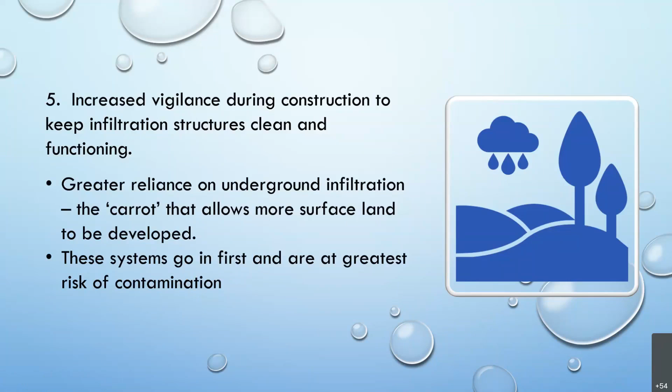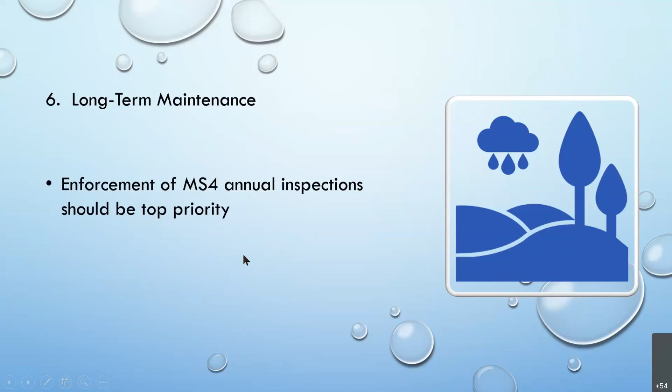And long-term maintenance, I'm anticipating through the MS4 inspection process, and we offer a service for that. It's not a regulatory thing, but we do it because we have the database for it. I think the towns are really going to have to step up their effort to make sure these are inspected and kept in good working order. If they just brush it off, in a few years these things aren't maintained, they're all of a sudden going to be a big surprise. Where's all this water coming from?

I'm wondering whether we need to verify that the systems are clean prior to issuing the final report of compliance. You could consider that part of our purview from a regulatory standpoint, because it's going to be on our plan, and we're taking some degree of responsibility for them, whether we get them cameraed, jetted out, or vacked out. We may want to make sure they're clean before we final them.

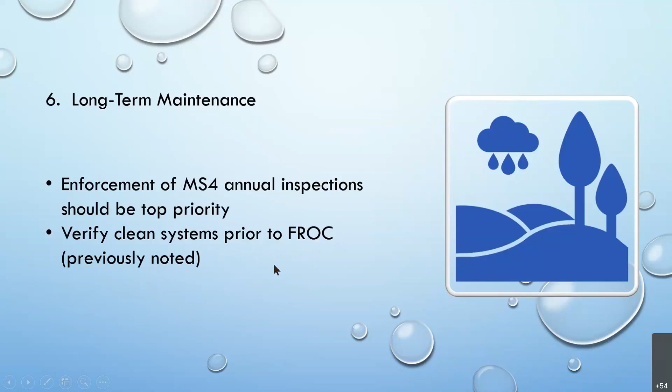And lastly, long-term monitoring. I'd like to know how they work over time. Maybe in a couple years we could go back and do something similar to what we did a few years ago, where we do a statewide sweep and actually check to see how they're working.